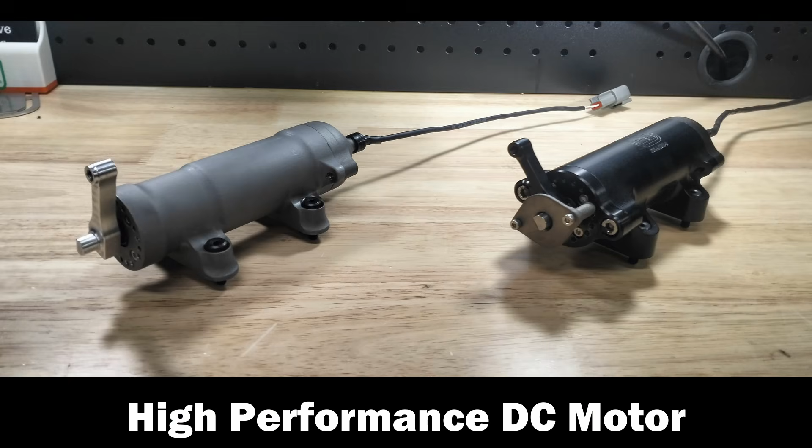So what I thought we would do in this video is do a bit of a reverse and show you the final product and how we got there step by step through the design process, so working backwards. How does that sound? Sounds good to me. Okay, so first up, what's the product?

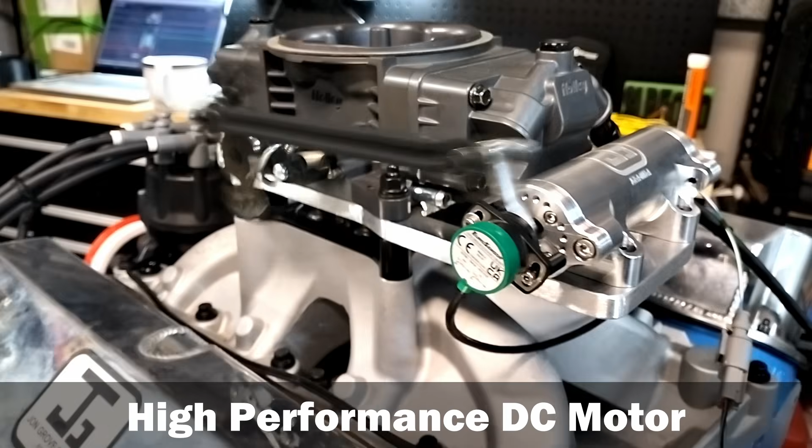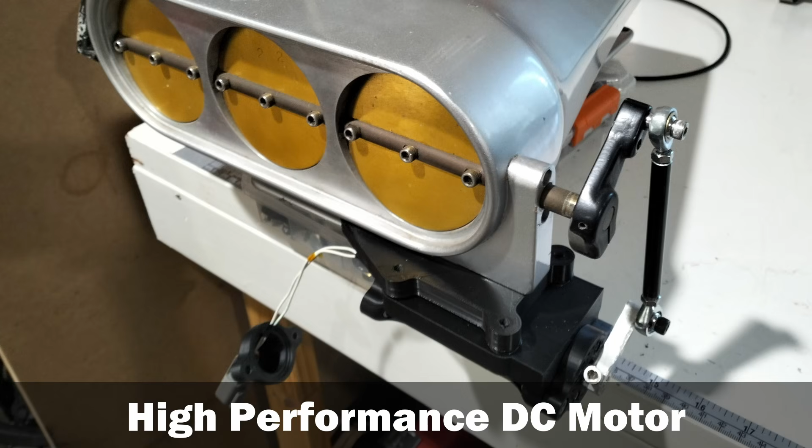So the DC motor was something that I wanted to generate, one for electronic throttle use, but I also wanted to start looking at things like variable trumpets. So can I design a product that can do multiple things? The DC motor was created and the idea started from there, and it was, all right, let's look at my history and what I've done and see if I can come up with something myself. It's been a few years and a lot of testing and development, but I've got something that I'm really close to putting to market, and we've got stuff out there getting real world testing. We'll go through the steps on how I got there.

Yeah, that's fantastic. For those of you that didn't catch the interview we did with John earlier, that history includes championships in V8 Supercars and NASCAR. So a lot of time spent with engines. So you really know what you're doing with these sorts of products. So what is it that's pretty unique about the product that you put together?

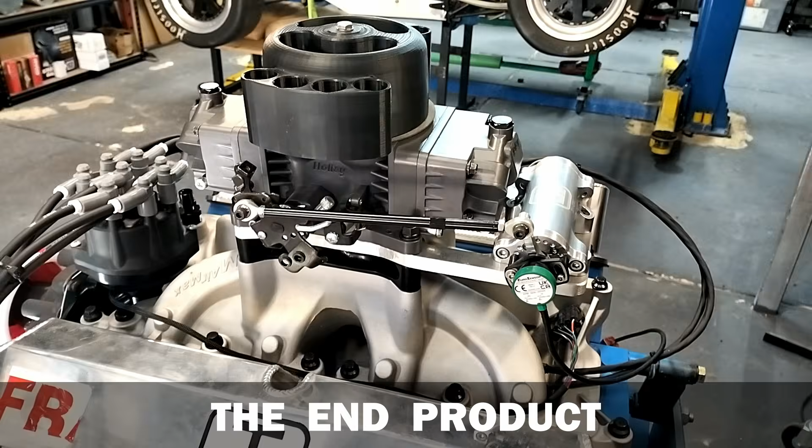The packaging was a big one. You know, there's a number out there that, well, they're on the bigger side. We'll just put it bluntly. And so you're from racing, and in racing, packaging, make it smaller, make it lighter, whatever we can. So it was coming up with a compromise between how can I make something as small as possible without going crazy on the cost. There's one hooked up here, but I mean, this is incredible. This one hasn't got the sensor on it. Not yet, no.

But it's just tiny, and I think the amount of development and the cost of something like this is just huge. And just holding this, you feel the quality of this product, and as an engineer, you just see the time. Yeah, you would have spent a lot of time on this, and it can be hard to justify, but it's a lot of design iterations. Running into problems, how do we fix that? Running into another problem, how do we fix that? How do we make it better?

And now we're at the point of track testing, and we've got them in cars, and we're seeing what's happening once they're actually working, because I don't want issues. They're unavoidable. They do come up from time to time, but I want to minimize them as much as possible and deliver as best a product as I can.

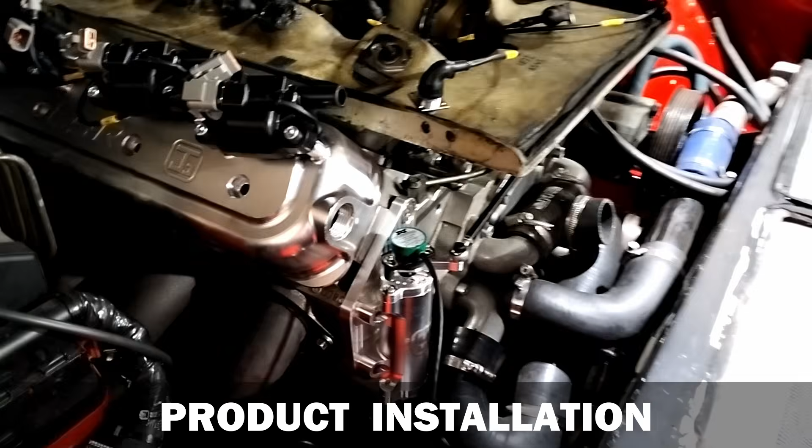So is there any difference in how this product is installed versus other electronic throttles or these sorts of motors? One of the big things with this is it's got a fair bit more torque than other manufacturers. The reason we did that was so it could be used for things other than electronic throttles. Let's get this right. You've built an electronic throttle with a lot of torque to put on your motor that produces a lot of torque. Yeah. So as I said, I've been trying to call it a DC motor more because I don't want it just to be labeled as that.

If you want to do variable trumpets, we're looking at linkage systems. We want a bit more power there so it can do those kinds of capabilities. So we've got something in the works for a Coyote, hopefully. If that project takes off, we'd like to do something there. We've got some people, and it might sound weird, but with mechanical injection, there's a crossover with a mechanical fuel pump and a barrel valve that, hey, if we could put a bit of control on it, it might actually be a benefit.

So those are the kinds of things where you just want to open up people's capabilities. So when I've been calling it an electronic throttle, you're just like, oh, no, it's a bit more than that. Yeah, and that's the goal. But it is easy to put it straight in that category. It's probably going to be the main use of it, but if you can think of something else that we can use it for, then by all means get a hold of us and we'll see what we can come up with.

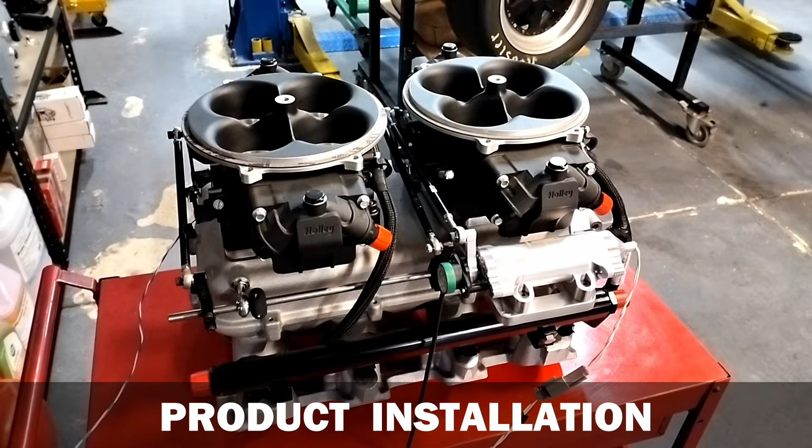And before we were shooting, you mentioned it's got something like a 40-to-1 reduction in the gearbox. It's got a planetary gearbox. Yeah, it's got a fair bit of torque going on. I'm really happy with that. Obviously, there's certain things we need to keep an eye on. It can create a lot of torque with more amps, but then you have to worry about heat. So we do work on making sure that the throttle systems are within a certain amount of load for safety reasons.

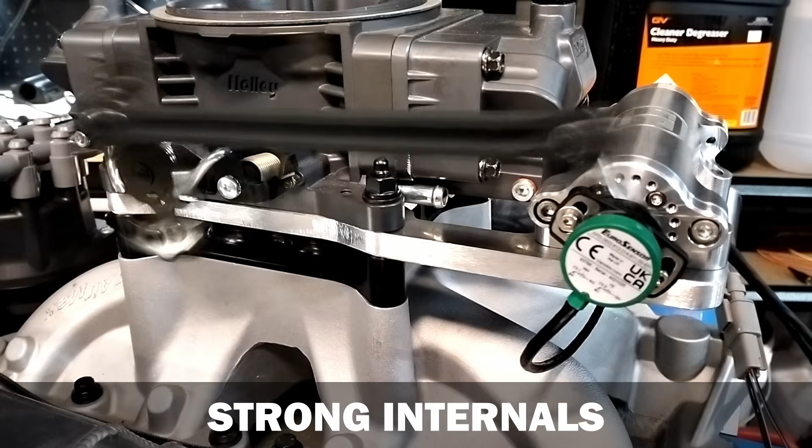Now, some of the solutions out there already, ones that are based off electronic throttles, often run plastic gears. I'm assuming you haven't gone plastic gears in this? No plastic gears in there. We have really pushed for the reliability. Everything's metal on the inside. I think I've got a pretty nice way of isolating the body, so there's actually a couple of levels of O-rings mounted with shoulder bolts that allow the DC motor to be solidly mounted, but also isolated from the mount.

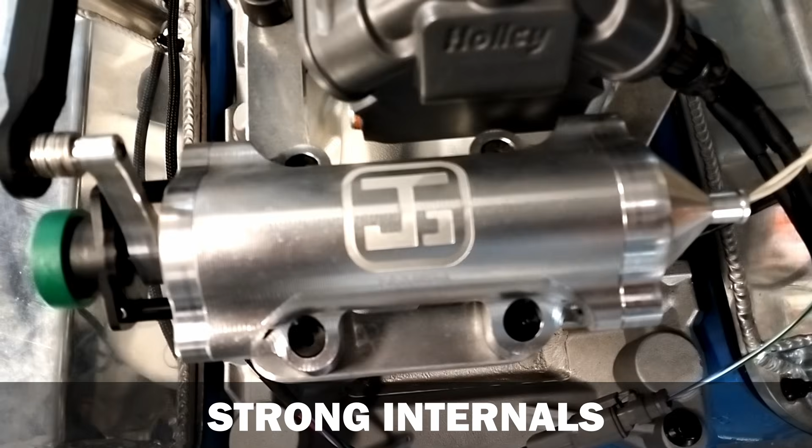It's very stiff in terms of it's not going anywhere, but it does take that bit of vibration out, which is always a problem with electronics. And that helps not only the DC motor itself, but the sensor. There's been a fair bit of work trying to get those materials right to get what we want, and we'll keep testing and making sure that's doing everything it's meant to be doing.

And this can be just driven by normal ECUs, or what do you need to drive it? Most of these have been tested on a Motec M150. We'll put those videos up, but there's nothing different from any other electronic throttle if you want to use it for that application. So you'd be able to use just about any engine management system. I mean, I know you're a Motec fan and a Haltech fan. Yep. So it'd work with those, but a number of other solutions. Correct. If it's capable of running drive-by-wire, then you shouldn't be having any problems.

Now, at this stage, am I right in saying that it hasn't been available for general sale yet, but it's in clients' hands right now? So you've had people that have bought this, that are testing it out. Is that about right? 100%, yeah. So we've got one on a circuit car, one on a jet boat, one on a drag and drive application. Everything we're trying to push to the limits, put them in some pretty extreme environments, and the customers are aware of what they're doing for us, but we want to get those Ks on there and make sure everything's doing what it's meant to be doing, and then we'll make it publicly available.

So far, everyone's been pretty happy with it. So far, feedback's been 100%. Everything's been going really well. So I'm extremely confident, but as I said, I'd like to tick all those boxes. So I guess that's the final product, and we want to work backwards through that design process. And I guess you're still in the stage of testing, aren't you? You're still doing those final validation tests. What other things did you do in the test program for this?

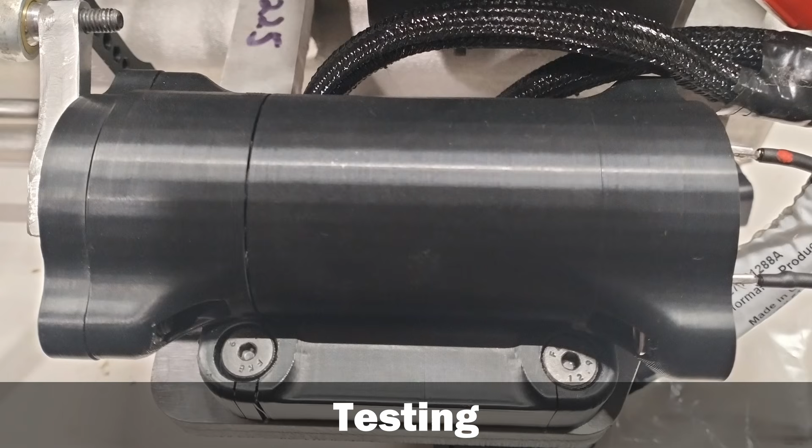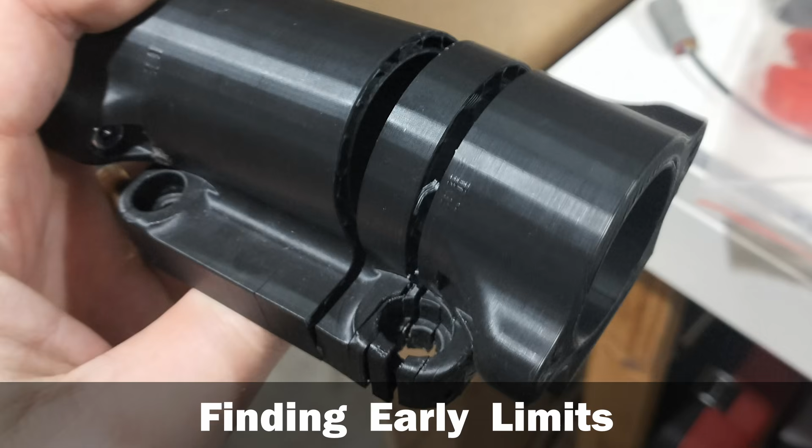So we started off with a plastic body. This was one of the prototypes that we started with, and it was, hey, can we possibly design something that could be run in a plastic body? So that's quick to testing. You're testing even during the early design phase. Very, very quick. We got that straight on a bench and put some load to it, and very quickly, because you can wire the motor to go around the wrong way, you obviously need to check that. But that very first iteration, when that occurred, the plastic body had an issue, and it's like, okay, I can't allow that to happen. So automatically we went away from the plastic body to a metal casing instead. So you've been doing testing early on in the design process using metal parts. Where have you been going to get the metal parts?

So JLC's been really handy there for prototyping, like getting stuff really quick, getting a design through and getting something to your door. We can see here, like this was the prototype 4150 mount, so we wanted to check, make sure the O-rings were where they were supposed to be, make sure the mount position was where we wanted, make sure the link arm was at the distance that we wanted, and having a product, basically in my hands within about 2 weeks, anodized, ready to go.

That was extremely handy. A couple of the test pieces I've got here are metal 3D printed, and again, just get a design done, let's try this out, click send, don't worry about it till it rocks up and you're on to the next thing. So that's been extremely handy.

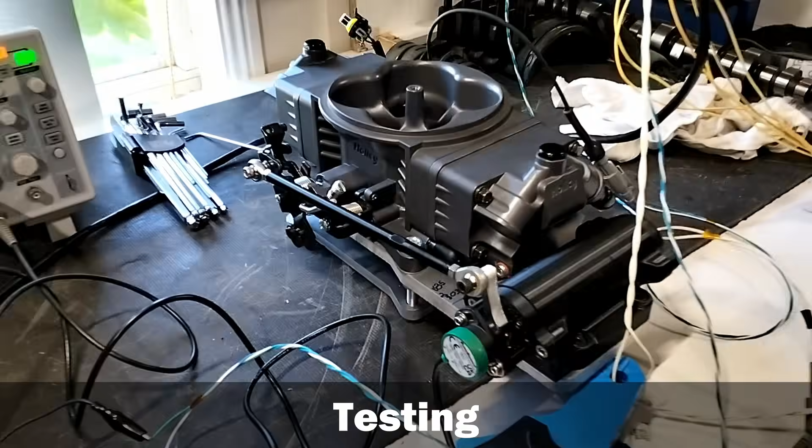With the iteration process, we got one of the motors set up. So we had one on the 4150 and we also ran this dual 4500 setup where we put an oscilloscope on there. We were measuring the amps, we were measuring the rate, we were looking at how much control we could get with the system.

So we kind of wanted to put a bunch of variations together with what people might be doing. We've got to look at how much inertia is in the system and can we still control that at the speeds that we're expecting. So even with dual 4500s, we were doing 1000% per second. So we were talking really fast throttle rates and the system's able to stay in control.

Definitely through that testing regime and checking things are fitting and how we want to do the isolation system, how we want to do the mounts, how we're going to integrate all that together. It takes time.

So you'd been going on this for about 2.5 years. How long did it take before you were on your first prototype? How long were you designing before you started the testing? Probably somewhere around 3 to 6 months. Obviously we needed to figure out what amount of torque we wanted to produce, how we were going to do that, suppliers and all those kind of things, and then we have to get all that geometry and make it all work. Figuring out what we're going to do with the wiring, how we're going to keep this thing watertight. There's a lot of little things.

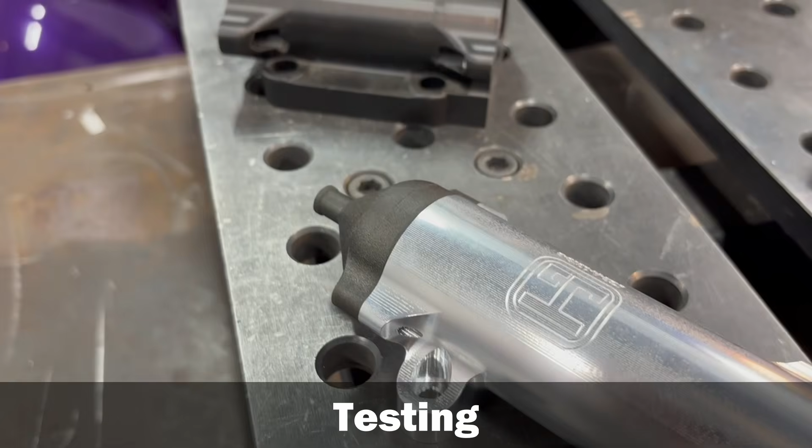As I said, you can look at this thing and it doesn't look that impressive, but there's a lot of small iterations. It looks impressive to me. But yeah, just really small changes, just to make it nice. So this one here's got a titanium metal housing over the wirings. While that's not as flash as say the billet end that we also supply, it saves a lot in cost. And for a functional aspect, this part isn't loaded, it's literally just covering the whole back of the wiring and the back of the motor and then sealing everything.

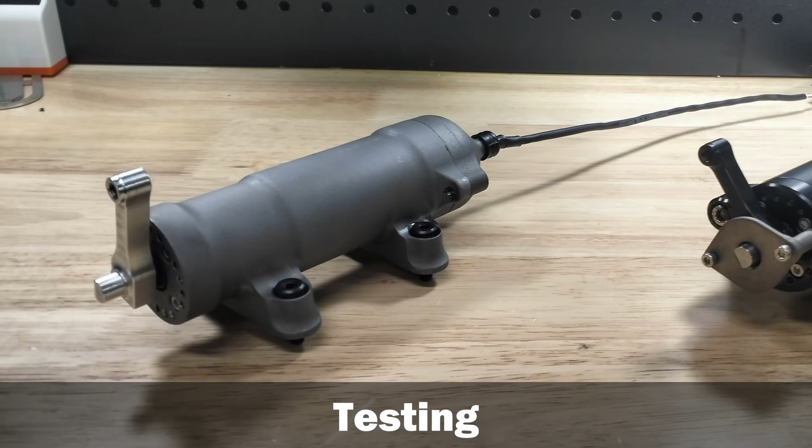I find it interesting that the thing you say is not impressive about it is the 3D printed titanium part. Yeah. That seems pretty impressive to me. But yeah, that's something that we want to put forward to the customers. We do want to give options. We understand that maybe compared to some of the other stuff, it is on the expensive side, but we are giving a really high-end product with a lot of testing that we're very confident in.

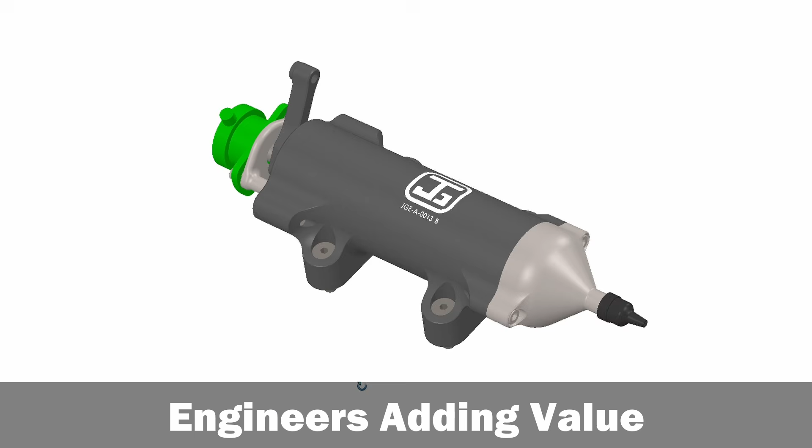Yeah, I know from the engineering process myself that often you're working with clients and it's hard to show the value and where the value is. And it's pretty easy to assume when you're looking at a product that somebody's modeled it up, got it right first time, and you're largely paying for the materials and manufacturing, when in fact it's all of that development work to get the performance. And for a really high-end item, it's not mass produced. Correct. These are CNC items, they're smaller numbers, and that testing is the value in the product.

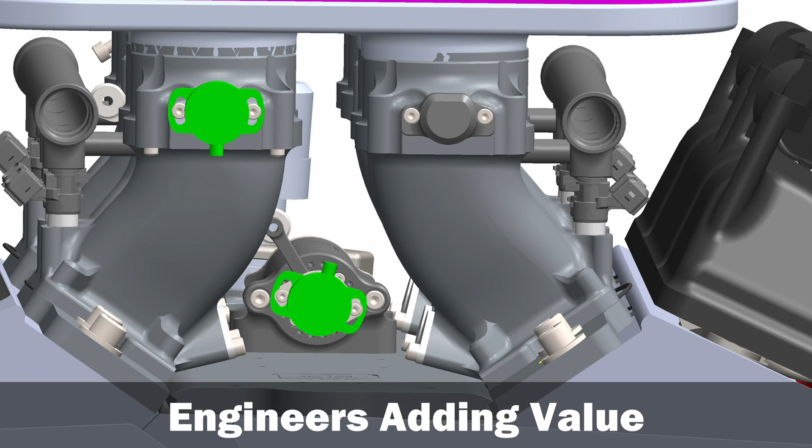Yeah, the end user doesn't see the development between drawing new materials, getting changes, trying different products, trying different setups. They don't have to worry about any of that, but that's something you've got to do to do the job right. The FEA takes time, the modeling takes time, doing all your CAD drawings, even just down to the details of your tolerancing. You get a part rock up and you're going, I'd like to change that. All of a sudden you've got another design iteration, new drawings. They're important steps and you need to do them, and that's the joy of running a business and designing your own products, but it is hard to get that across.

And I think if you spend any time in motorsport and around cars, you do see, well, let's just say some parts of varying quality. So you might see billet parts that actually when you go to run them, you're thinking, no, the work hasn't been done here and it just doesn't do the job. And it can actually be quite disappointing when that engineering process hasn't been followed. So it's great to see it here.

Is there anything in that testing process that you found really altered your original design? I don't think so. I had pretty clear goals with what I wanted to accomplish, and I wanted to stick to that. It's really easy to have a project get off course. Timelines can blow out. It was already a bit longer than I was hoping for. We kind of stuck to this is what we want to accomplish and this is how we're going to do it. Most of the iterations and changes have been small, just to dial everything in. We haven't had anything major, and so far with physical testing in vehicles, we haven't had anything go wrong. So we're really happy so far.

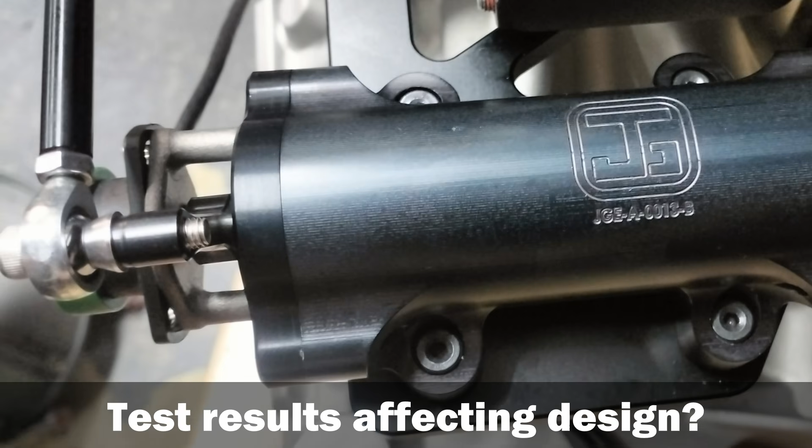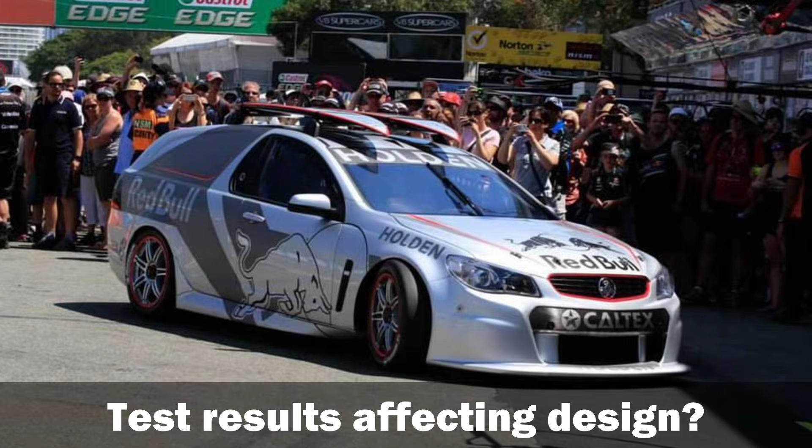That's quite a relief. Sometimes when we're designing parts, we have the exact opposite. But I guess you've been working around engines for quite a while, so you have a little bit more idea of a product like this. Yeah, so I've been lucky enough with 888, I got to work on the Sandman where we converted a supercar engine to drive-by-wire, and we did a bit of work in supercars later as well, looking at drive-by-wire systems on individual throttles.

So I'd been through that design process, I'd done the work, so I knew what worked, what didn't work, how I would want to do it. Realistically, the project didn't start when I started drawing it. It started way before that, going through the pain of figuring it out the first time.

Yeah, and seeing the other products and seeing what the competitor products are. Correct. And they do fantastic jobs, there's no doubt, but for the applications that I wanted to apply this for, this is what I thought was best. So this is why I've delivered what I've delivered.

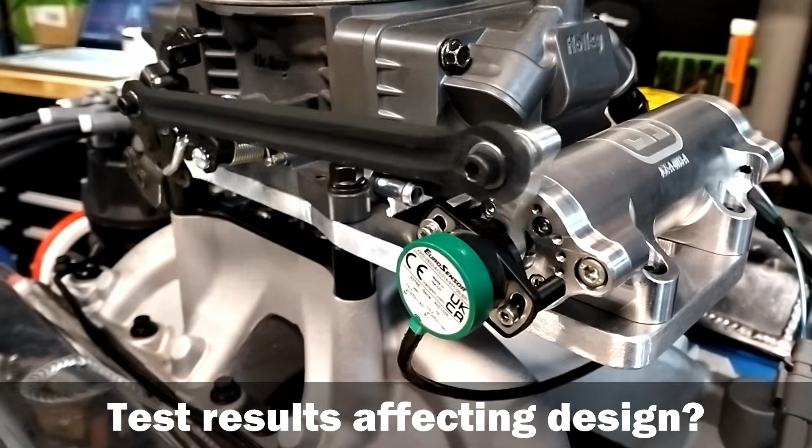And I think one thing to note is that this is a product that hasn't really had any great variations from the conceptual stage, being developed by somebody that really knows these technologies well, has used them in the past, and it's still 2 years of testing before it's in a client's hands. And I think that cost in development, it's really easy to underestimate the amount of time that you're going to spend in that testing phase.

It's not something a customer wants to hear, that you had failures, but that's what testing is for. You can't get everything right the first time, and you've got to go through these processes to tick the box and make sure that you're doing the best job you can to eliminate any problems before it goes to market. It would have been really easy to rush this out a year and a half ago and just give them to people, but that's not the right thing to do.

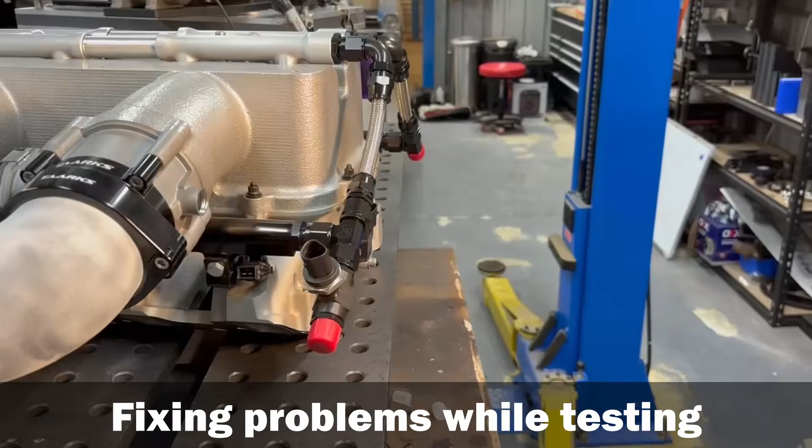And we do that with everything I've got. We've got the Group A manifold there, that's been done for nearly 12 months, and I still haven't put it out on market because I want to do more testing. I like to think with engineering that you're wrong a lot until you're right, and the only way that you know you're right is successful testing.

Correct. So this is a high-end product, one where you're not going to make huge numbers of these. How does that influence the choice of manufacturing techniques? So as I said, we experimented at the start with plastic. We did think that was an option, and testing early on proved that's probably not best. That wouldn't have been 3D printed plastic though. You probably would have gone to some sort of molded plastic. Potentially. Obviously the prototypes were 3D printed. It's the fastest way of getting a product and being able to go testing.

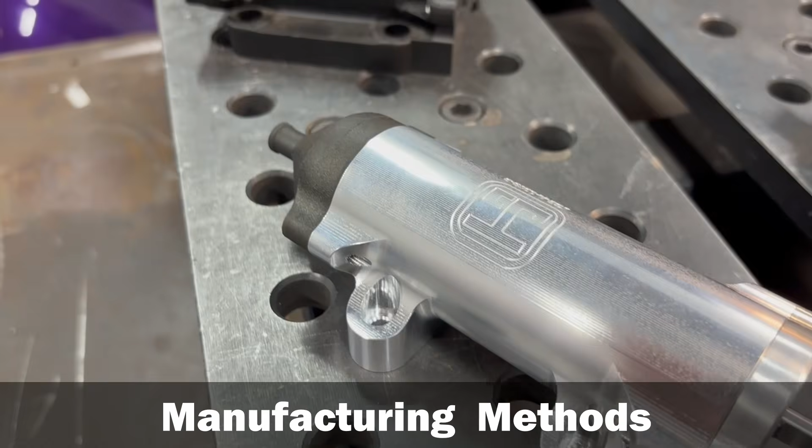But for the situations that may occur, I would prefer not to have that as a potential risk. There's definitely the option of casting. We're probably not going to have the numbers to make that worth it. And with casting, there would be the casting and then the post-machining. So if you're at that point, maybe the CNC option is the best, and that's what we ended up going down. So we mixed the CNC and the 3D printed metal to give the best value product versus what it needs to be capable of. And that's performance, cosmetics, reliability, cost. We're trying to optimize all those items, not just concentrate on one, knowing that we want to use it for multiple applications.

Yeah, and I think that CNC hits a bit of a sweet spot. The 3D printed metal, if you're doing a one-off or really small numbers, can be absolutely fantastic, but then the CNC starts to come into its own once you have the program: you hit run, there's another one coming out, hit run, another one. It's not as quick to produce the same numbers as casting, where you can get your unit cost way down, but it's really convenient to be in that mid-range, when you're looking for more than a small handful, and you can amortize that programming cost over a number of units.

And it definitely gives you a bit of flexibility if you need some iteration changes. There's no change to the cast. If I want to change this bolt size, or move this or that, it is a lot easier with a CNC program.

Yeah, quite a while ago I was working with a person developing their own Formula Fords, and they had gone down the route of a cast gearbox housing, had some fundamental errors in it, and they were stuck with it. They had to work around the cast for generations, because you have to get that cost back, and you can't go back to square one. So the problem with casting is if your design's got any variation you want to make, every variation means a whole new process.

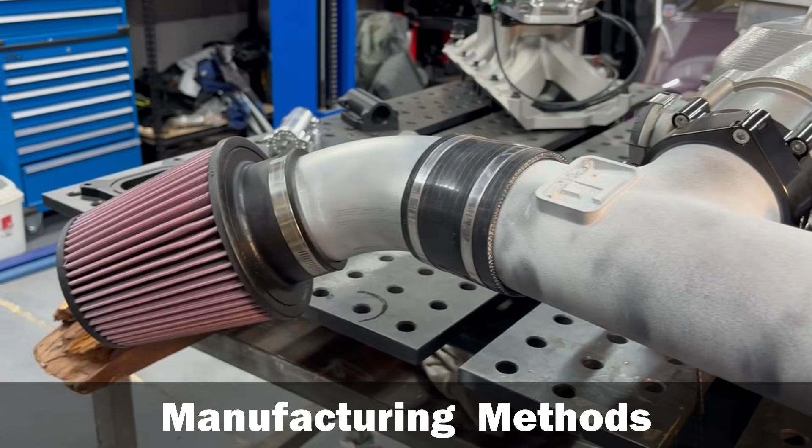Yeah, I mean, you could be looking up to 100 grand for molds. So it is something you need to take into account, and it's application specific. There's definitely cases, the example being we've done a cast Group A lid. We could have done billet, but for the application, we went down the cast road. So I think that's where size comes into it as well.

So with the Group A sort of manifold thing that you've been working on, which is pretty cool in itself, and maybe a thing for a future video, I hope so, yeah. That starts to get really expensive if you're machining from billet, because you're dealing with a lot of waste. Yeah, you're starting with a really big chunk of metal to get rid of most of it. There's definitely nothing wrong with that, but it's about balancing cost, cosmetics, performance, and delivering the best product you can for the customer. I think something around this size, it's pretty much perfect for CNC. Yeah, 100%. And that looks fantastic. It does, but I'm biased.

So I guess with Jon Grove Engines, you're not quite a one-man shop at the moment. I mean, I know your wife's involved with the company as well, but your numbers are pretty small. Like it's really you doing the engineering for all of these products. You don't really have too much of a choice at this stage to do a lot of in-house manufacture. So where do you stand on these sorts of products with how much your design is altered based on whether you're able to bring things in-house or send it outside?

So like all businesses, we rely on other people. You can't do everything yourself. So we need to make sure that we're working with the right companies to deliver the right product to the level that we want and have an understanding of what we're trying to achieve. I definitely focus on the areas where I can have the most input, and then we deal with those kind of companies. While we're not manufacturing in-house at the moment for billet parts and stuff like that, that's something potentially down the future, but right now, we're doing a lot of product development, so we're doing a lot of CAD, we're doing a lot of FEA, and that's where my time needs to be more focused.

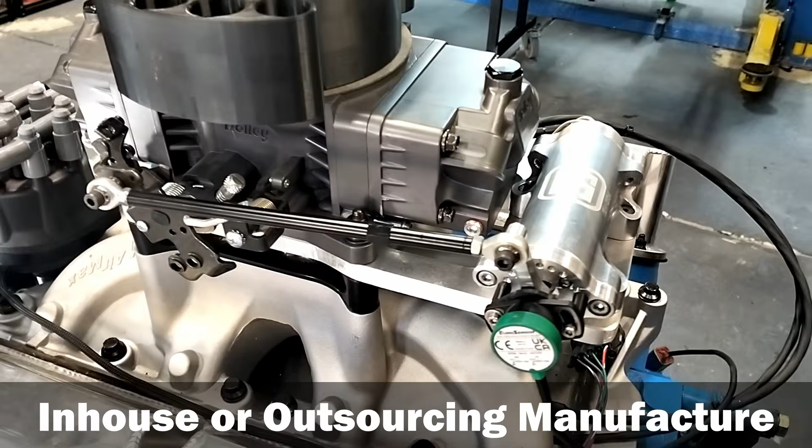So if I can have companies doing some of this initial work on the East Coast, like Scaff Engineering down in Victoria, I know the quality of work that they're doing and I can be comfortable. We're going, hey, this is what we're trying to do, and I get back what I'm hoping for. You need to be very conscious of not focusing on one area. Our business revolves around multiple facets, and you need to make sure you're ticking all those boxes. It's worth noting here that you haven't got a company that's assembling the whole thing. You're getting individual parts made, and then you're putting it all together. Correct. So you have final quality control over the product. Yeah, correct. We're building these to the highest standard that we can.

Yeah, and I think that's pretty much what we'd expect to see in anything automotive. I mean, no car manufacturer makes every little part of their systems. They're actually putting together major assemblies into things like vehicles and so on. So it's not a different process, but I guess a difficult one to manage. I mean, how do you manage the fact in a product like this where you have multiple suppliers for different parts? How do you organize all of that side of manufacturing?

It's just a lot of work. I mean, you can't put it down to anything else. So, we've got multiple spreadsheets with what's going on where. Obviously, we run an online accounting software. It's just about being organized and putting the work in. So there's no real way of getting around it. It's not something that you can call AI up and go, hey, I need a bit of a hand with this. You've just got to be doing all the right things and making sure you're staying on top of it. Communication is a really big part of that.

So with your suppliers, with your customers, there's always something going on in the world that affects things, and you need to make sure that you're on top of it and everyone's aware of what's going on both ends. Yeah, and I think if you've been around engineers very much, we tend to get accused of being maybe emotionally distant or poor communicators. And I think that's a bit harsh, because in the engineering game, you have to be effective communicators.

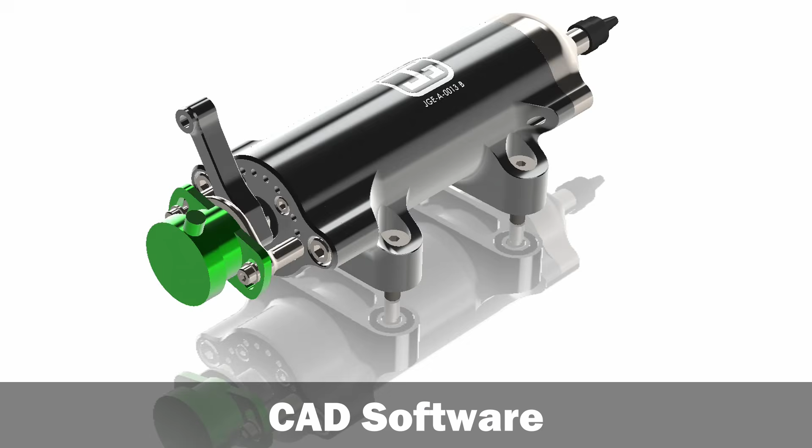So I've been using SolidWorks pretty much my entire professional career. It is what I know as well. Most people are comfortable with what they know, and it gives me a lot of capabilities when you start adding in FEA, CFD. It allows me to do a whole lot more than just draw. When you start putting things like a PDM in there, that can help eliminate some issues. There's definitely a lot of time spent at the computer drawing lines and making everything fit.

We're going to the point of making sure we've got all the fasteners in there, our bill of materials is correct. We're getting to the point of, hey, this is the bolt list for this part. This is the O-ring kit for this part, and we've got all that separated so stuff can be ordered as a kit. There is a lot of work on that side that also doesn't get seen. There's hours and hours making sure the paperwork and the information is stored correctly for future and past.

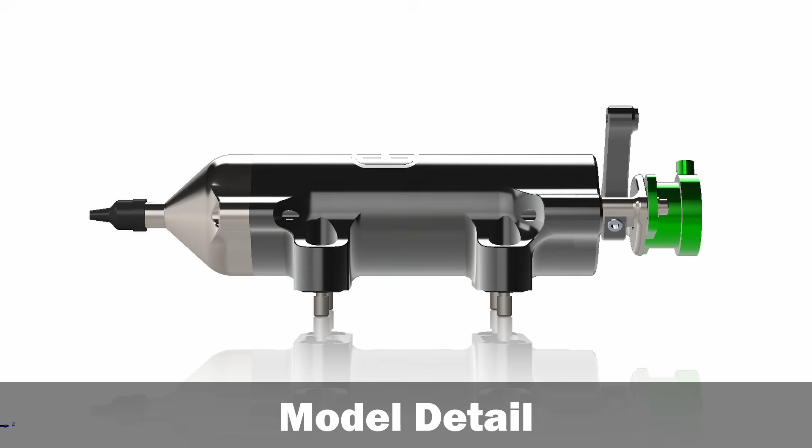You're a fairly handy machinist and fabricator yourself, and I guess when you're making your own parts for your own projects, you don't necessarily need to model everything 100%, but for a product like this, every last detail. Correct. And if we are making small iterations through time, we need to make sure we know what customers got what. You can't go too far. I mean, you can obviously with time, but realistically, you can't have too much detail.

How much of the later stages, such as the manufacturing and the testing that you've got to do, how much of that reaches back into the detailed design? How much of it are you considering before you have that first test of a prototype?

You've got to try and think of every situation. We're not just putting these things in cars, we're putting them in boats. Then you're looking at a whole different environment that they've got to work in. So you want to go through all of that in your head while you're doing the design process, because it's a lot easier to do it then than after.

And that's the hard bit, when you're doing FEA and calculating loads and stuff like that. It is trying to think of every situation that this part might go through and doing the work then. It's really easy to go, hey, I tested this and I tested that, we're good to go. And then someone goes and sticks it in a situation that you didn't think of, and you go, oh, in this application, it's going to see this. So that's where experience comes into it, knowing what you're going to be doing with it.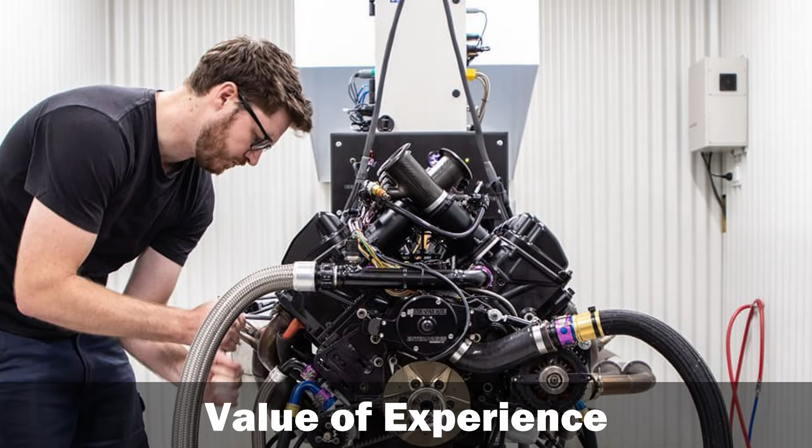Before working on your own company, you were doing some product development for mainly the mining industry after you were working in motorsport. And I guess each project, you have to very carefully allocate time as to how much analysis you do in each stage, because at that detailed design, if it saves you time later on, that's a real bonus. But if it just costs you time and you don't learn anything from it, it just adds cost to the process.

Yeah, so in that kind of situation, you're trying to do basically a little bit of learning with every project and then carry that through. You can take that situation and go, we can apply this to the next one and then the next one. And you start getting a bit of a boundary box, and you'll find you're doing less and less of the big stuff, and then you start getting into more detail and then more detail, and then how do we get more efficient? And then, hey, where can we start saving costs? Where can we reduce our material usage? Where can we reduce our welding?

So it should never stop. If you're doing a really good product, then you should always be going through it. Or you might be one of these companies that has been making the same thing for 100 years and you never have to change anything. I mean, that sounds great to me, but I also like the challenge of developing products.

So I guess it probably would have been the same for you, but when I was a junior engineer, I think the thing that amazed me about people that had been doing it for a while wasn't that they were doing anything considerably more impressive. They were just going into more detail. So the senior engineers just always seemed to be one step ahead and thinking about another aspect of the project that you weren't really thinking about before you had that experience. I was just massively impressed by senior engineers putting that detail work in, and I guess our journey as engineers as we develop is to learn the importance of that detail.

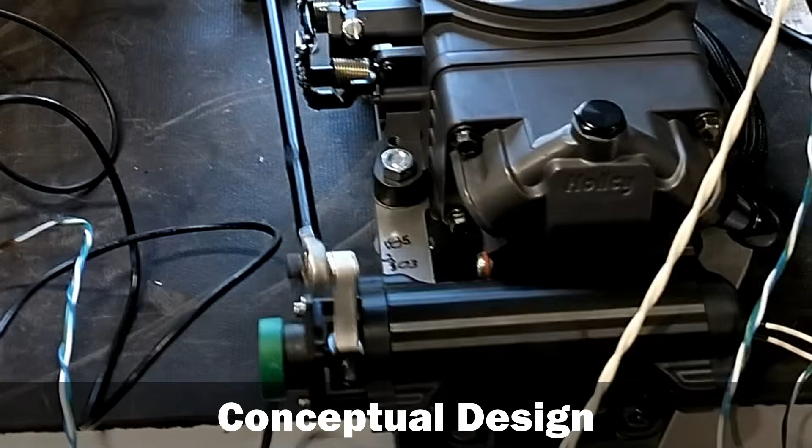I kind of took the approach that I want to fail fast. I had something in my head, let's get it into CAD and let's get something printed as soon as possible. I have to say, I think the concept time allocated to it was actually pretty short, and I think that just came with the experience and knowing what I wanted to achieve really clearly, compared to say the Group A manifold or some of the other projects where I was just starting afresh and it was literally just, let's take this idea and see what we can do with it. The DC motor was something that had been in my head for at least a few years.

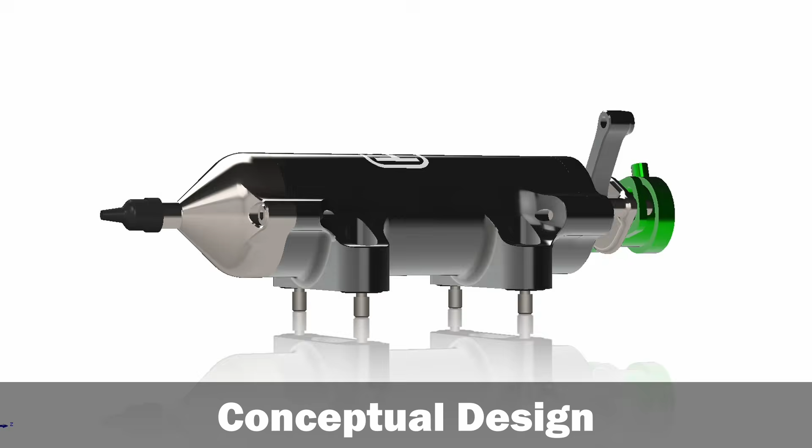It really helped narrow down that concept time, which can be really draining, and it can be frustrating when you're just making these small changes and you're going, oh, I didn't think of this. And then you've got to go back and your model explodes and you start again. And that's always a really tough decision when you're looking at a fairly serious CAD model and you go, I really need to start this again, because it's getting a bit patchy or too many iterations going on, and they can be really time consuming.

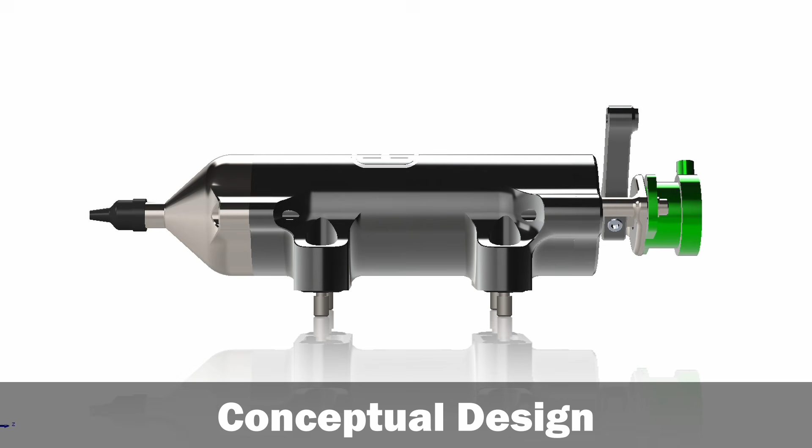The biggest thing we all want to achieve is you want that thing in your hand. Yeah. So you want to get it off the screen and start working with it. I guess that's why I asked how much of it was formalized, because so much of your conceptual design would have been occurring just you thinking about the product for the years beforehand, before starting that. And that's not really captured as a cost, is it?

No, and it can depend on the person as well. I tend to be quite visual, so maybe I should have done more of that, but I just wanted to get the thing on the screen and start looking at it. And then that's where 3D printing with plastics, and how cheap and readily available it is to have one of those in your workshop and just print something and get it in your hand, has really changed how quickly you can go from concept to, as I said, holding a physical part.

Technologies like 3D printing start to blur the lines between what is a conceptual design and the detailed design. Very much so. Because you're not first printing something that you think is completely sorted out. You're heading to that manufacturing phase really early on, just to get a sense of, is this what I think it is in my head? Yeah. So I actually think the 3D printers in that conceptual phase are really valuable.

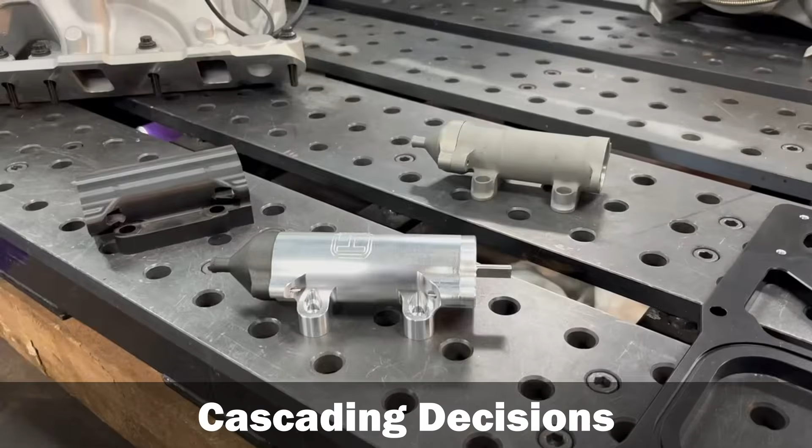Once you've got the key goals that you want to achieve, like the isolation mount, I want the sensor on the end, you go, I just got to figure out how to make that work, but this is what's happening. That side of things can be very fluid with how they happen. Yeah, I always loved that stage of design where things seem to flow and everything just is coming easy, but there's usually so much work before that.

Yeah. And so making the right decisions conceptually and in specification and everything gets you to the point where you can have that flow in design. Yeah, and then you usually get to about 95%. It's the last 5% that you got to get through. Yeah, that's the extra year and a half in testing.

100%. So even before we hit the concept stage in design, and I think we've already started to hint at it, you start with a specification as to what this product is going to be. What are some of the key things that you would have pulled out from the specification? Were there particular goals in mind? I guess was speed a goal or torque a goal? They both were definitely up there.

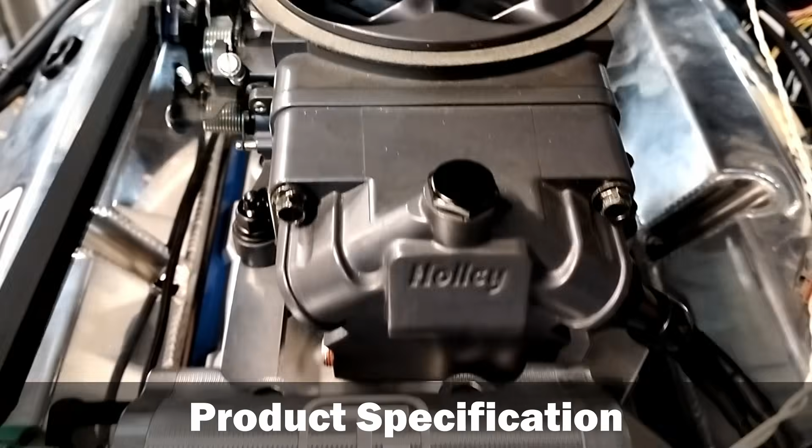We know from experience with working on race cars what kind of throttle weights I needed to accomplish. Knowing what gearboxes were available, how we're going to hit that, what torque's going to be required to do those kind of things. Understanding what kind of loads it might see, you're working back from that, and they're kind of setting those points for what you need to accomplish, and that narrows your field of view down for products and stuff like that.

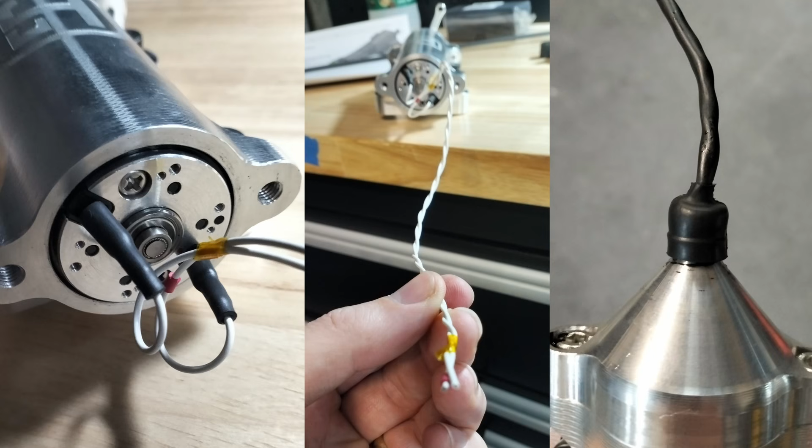For me, as I said, not being very strong electrically when I started this, there was a little bit of learning as well that I had to go through with what's going to be best for the application. Even things like what's the best way of wiring this to be as reliable as possible. And in those situations, it's best to go and talk to people that have experience. It's a lot faster to go and have those conversations than find out the hard way what worked and what didn't work.

So I guess in that specification stage, when you're trying to figure out what those numbers would be, what the sizes of things would be, and before you're going into that design phase, you're bringing in other sources of information to help you define that. We have to admit to ourselves that we can't know everything.

You need to know when you can do the best job and when it's best to get someone else in. So my priority, as I've kind of been pointing to the whole time, is how do I supply the best product I can, and where I'm not the best person, I make sure they're involved.

So yeah, and I guess the fact that you didn't have to spend too much time in the conceptual phase, and even the detailed design phase, you're basically saying from start of this project to the first testing was really only 6 months, which may sound like a lot of time, but for a product that you're intending to sell is absolutely not a lot of time to get through those phases. That really comes down to a very clear specification of what you wanted for this product.

As I said right at the start, that's where these projects can get out of hand really quickly if you let that vary. Sticking to that specification, I mean, you don't always get that luxury. Sometimes you have to come back and change what your specification is, or as you're learning things, you realize, oh, this isn't possible. But I guess a successful product development like this, which still takes a long time, if the specification is clear at the start, you have a fair chance of success at the end.

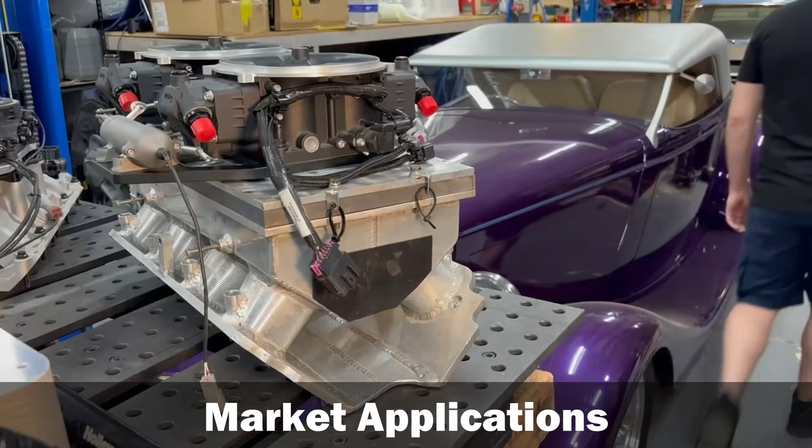I see that you've got the product here on a couple of heads, and to me, they look like sort of carburetors. But they're not, are they? No. So these intake manifolds, we've got the Holley 4150 throttle body. So while this does look like an original carburetor, it's actually got injectors on the inside. So I know some people are still very much on the, carburetors make more power, but I do like my EFI, and as I said, the drive-by-wire gives me a lot of advantages.

And then we've got the tunnel ram with the twin 4500s. Again, what we're looking at is control. Yeah. So we've converted this from carburetors to EFI as well as the drive-by-wire, and there's going to be a lot of freedom that this is going to give us, and we're really looking forward to the testing on that. So you've still got all of that classic look and feel, but it's really advanced. But with all the benefits, yeah.

So there's definitely nothing wrong with the carburetor. I'm not saying that, but yeah, in terms of what we're going to now be able to do with this, it's on a whole nother level. So we're really looking forward to that, and I think it's where everyone else is going. So hopefully we've picked the right path, and all this follows suit.

So right at the start, when we were talking about some of the clients that are running these motors now and doing some of these final stages of testing for the product, you said, was it a jet boat? Mm-hmm. It's on a drag car and a circuit car. So I guess this sort of product is bringing that technology to racing, but not even just cars, just anything that's got this sort of motor on it.

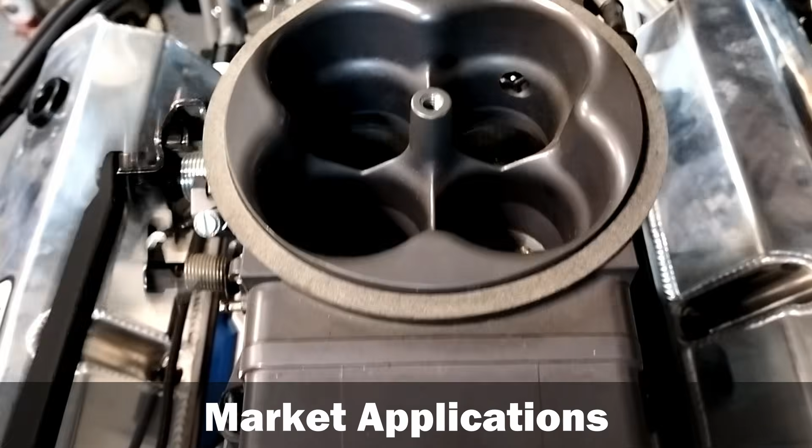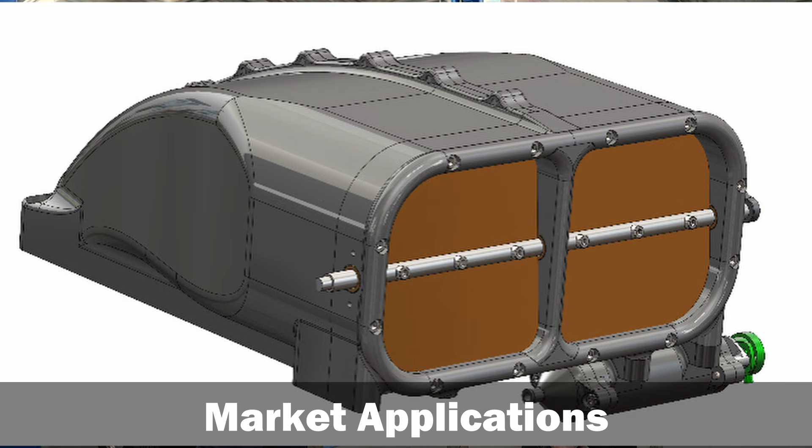and how far they can push it. As I said, I was more focused on what I was doing and what I could accomplish, and now that other people are seeing what's possible, I said we're going to make it publicly available and allow other people to take their ideas and see what they can do with them. We're at the point now where we've got a supercharger intake manifold, bug catcher or whatever we'd like to call it. Imagine having something where you can control the rate of that throttle, or you can put your foot to the floor and only get 5% of throttle blade movement.

Stuff like that, it's just what can I do with it, and see what you can. I'm still going to keep pushing it as a DC motor. I don't want it to just be used as a throttle. I'm really excited about the Coyote manifold with the variable trumpets, and we'll just see what anyone else can think of. I guess the fear for all product developers is that you'll get 2-3 years down the track and somebody else is going to come out with the exact product that you've got.

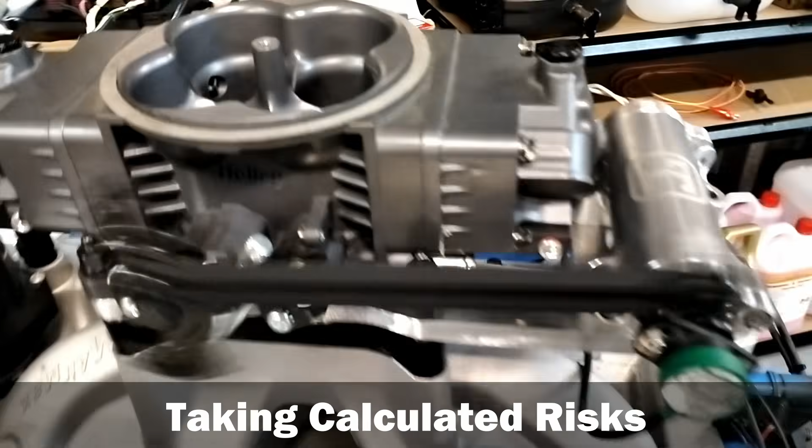How confident do you need to be that there is a place in the market for this product, for you to be willing to put that huge amount of time into product development? I guess I need people, when they figure out who I am and what I'm doing to make this as good as I can, to have faith in my product. There's definitely no guarantees in life, and items are very easily copied, especially these days, but it's putting their faith in me as well as the product that they're getting from me. After that, you just have to go with the punches.

That's also an aspect of engineering: product development takes time. It takes money, it takes time. Sometimes time is money, and there's a risk associated with it. So anytime somebody has gone through that product development cycle, you reach the end, and if the market is still good, if there's still applications of it, then that can pay off. But you have to take the risk. And you can't know everything at the start. So you try and do as best you can to be pretty sure that even if a competitor comes on, you've still got a good product that can compete with whatever comes in the next 3 years.

Yeah. So I guess this is towards the end now, but you're straight on to new products. Yeah, we're constantly developing multiple products at one time. We've got these being tested currently. We're about to hit the engine dyno with a couple of new intake manifolds and setups. A couple of those will feature drive, the DC motor. We've got all kinds of products going on the website. We're not stopping. If I've got these ideas and I think they're good ones, then we're just going to allow people access to them.